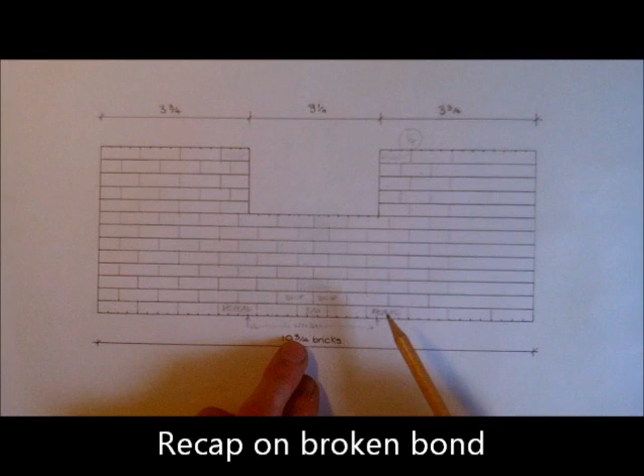Okay, so just a very brief recap on what we learnt in the last video, lesson 9. We did look at this picture here, where we introduced lots of things, and again we started off the whole of the lesson talking about dry bond, where we lay out the bricks just below ground level to make sure that we highlight any of the problems that we're going to have.

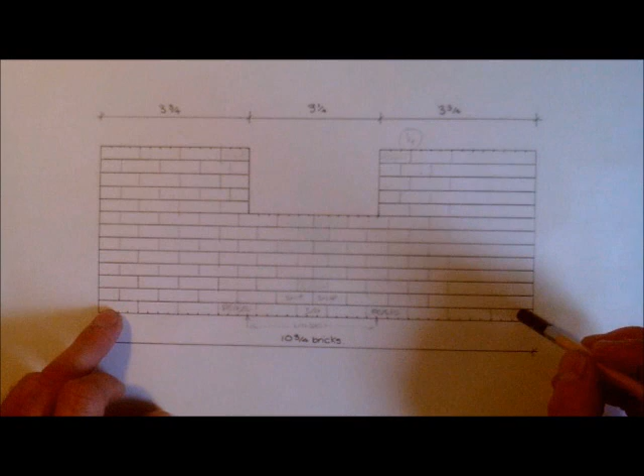We talked about whole bond, and that again was where we start with a stretcher, the bricks go all the way through and finish off with another stretcher. Invariably we said that that isn't always the case, so sometimes we have to go to reverse bond, and if reverse bond doesn't work, then the final option is a broken bond.

And what we started to go into, which we will continue to do now, is to emphasize the fact that a broken bond is rather unsightly, can be unsightly, and the skill of the bricklayer comes in where we can hide it in the best place. And if it doesn't have an internal corner where it can be hidden, and it has to be placed under a window or the sides of reveals, then again we have to look at ways in which we can disguise it the best way we can.

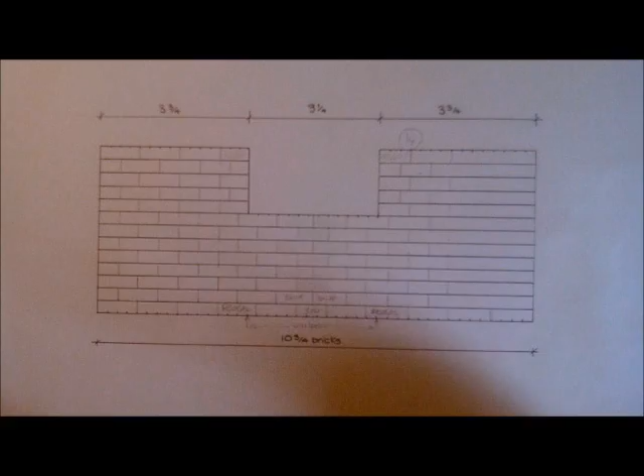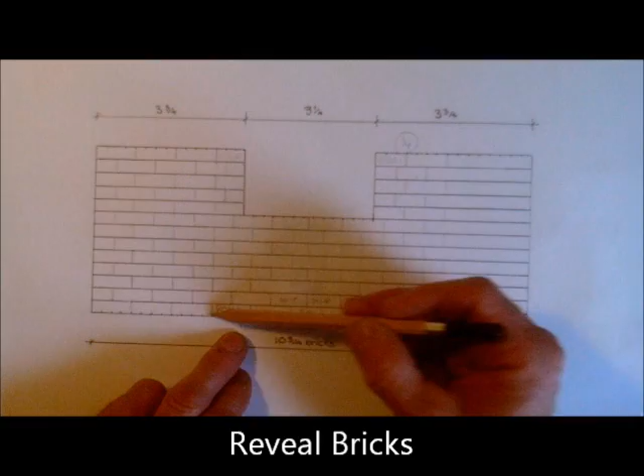We also talked about the zips that occur, and in this example here again we just mentioned about the 2/1, which looks much better. We also talked about the reveal bricks, where they are marked out on the substructure when the first course is being laid out, and then these ones should be plumbed up.

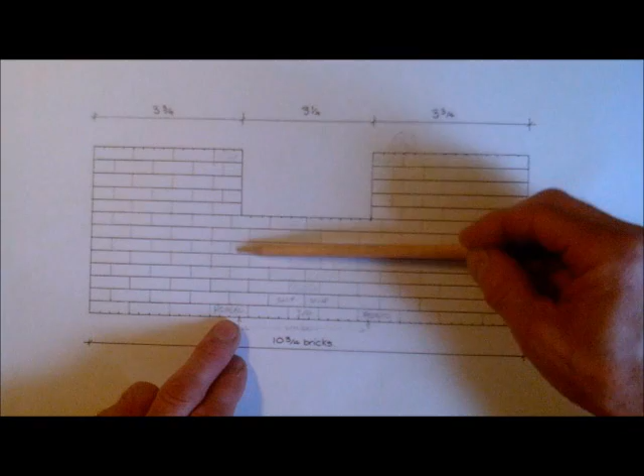What wasn't mentioned in the video though is the reason we plumb these ones up is so that when the window is positioned, the joints, which I've seen in a few cases, don't suddenly jump over to accommodate the window because these haven't been maintained in an upright position. So this just makes sure that these joints all run up. And this is what a bricklayer is always looking for, that his joints are all plumb. So plumbing up the reveals just means you don't get that sudden shift when you put the window in. So that's the importance of that.

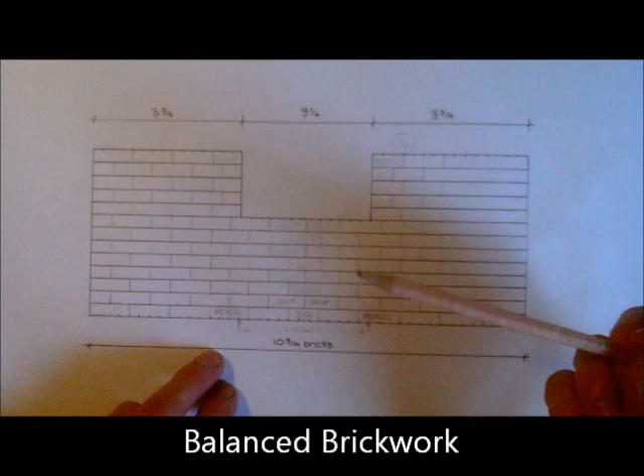We then talked about balanced brickwork, and just to emphasize again, balanced brickwork just means that we have the same cuts or bricks either side of the opening. Okay, we're going to now look at this and where this originated from as we go through this video as well.

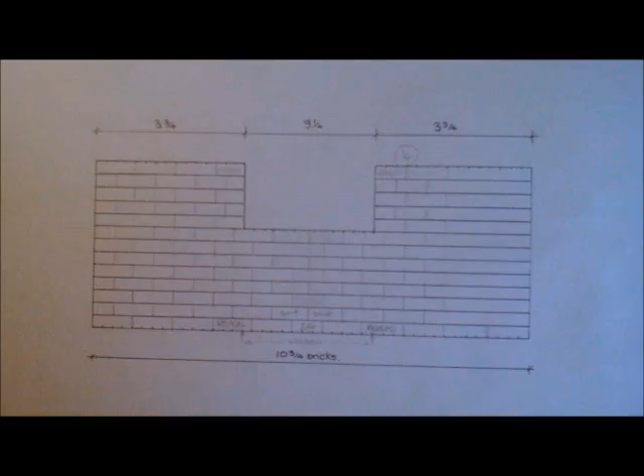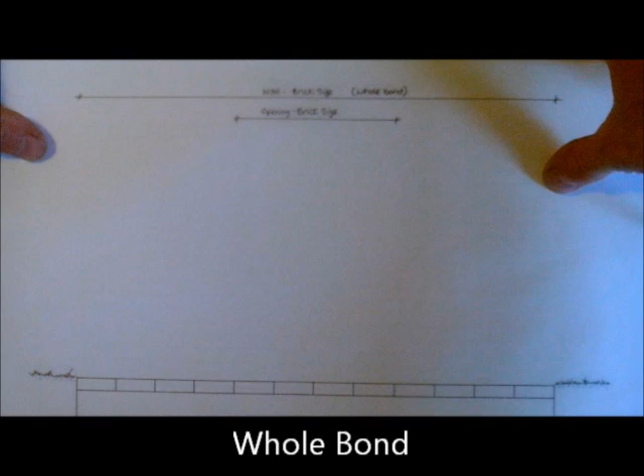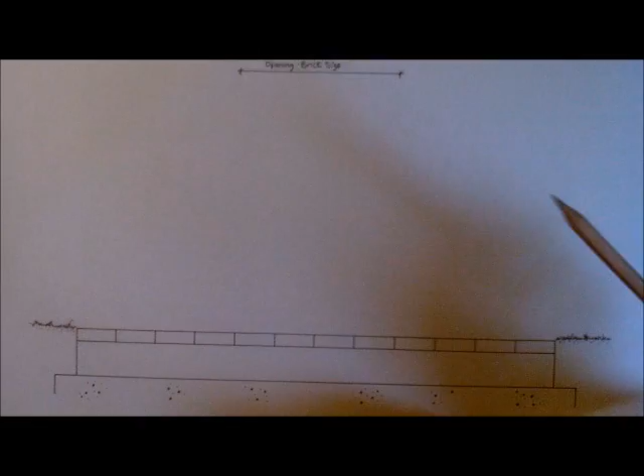So if we start from the beginning again, we're looking at, we'll just move this down, a wall here that is brick size, whole bond, and the opening size is brick size as well. So just want to emphasize what this looks like. Again, we've got the brickwork chased out on the substructure, and when it's whole bond and the wall is whole bond as well, then the result is exactly what we're looking for.

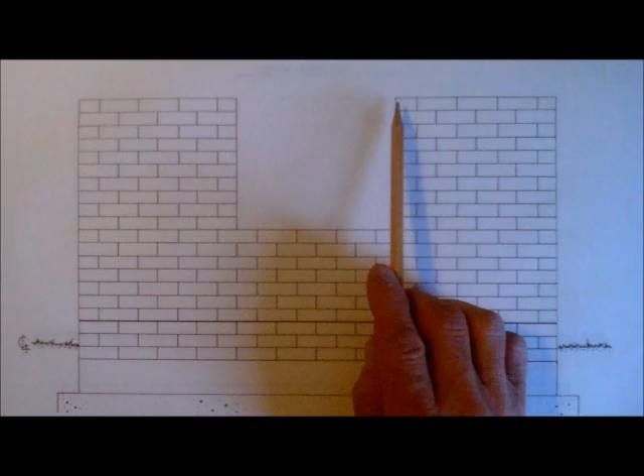We want our brickwork to look like this, where we have half bond, there's no cuts, the opening is brick size, so everything works in nicely, and because it's half bond, the window's positioned so we have balanced brickwork as well. So every box is ticked in this case, but unfortunately this doesn't always happen.

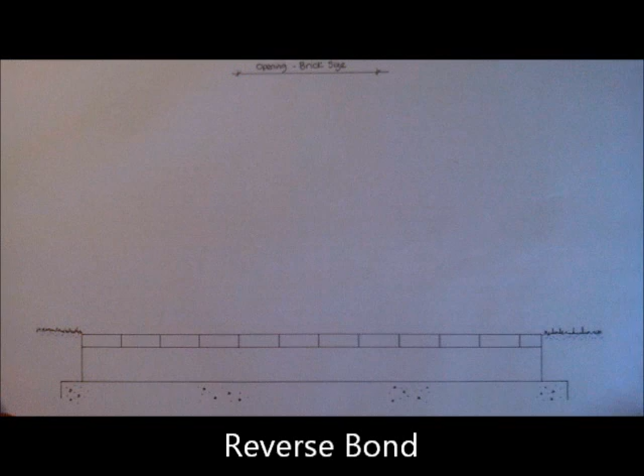So if we just go to the second one, if half bond doesn't work when we're setting out, we can see in this one we've got a wall that's brick size but in reverse bond, and then we have an opening that is brick size. Now this one is a little bit interesting because we have reverse bond, stretcher, they run all the way through whole bricks until we get to this end, and we have a header.

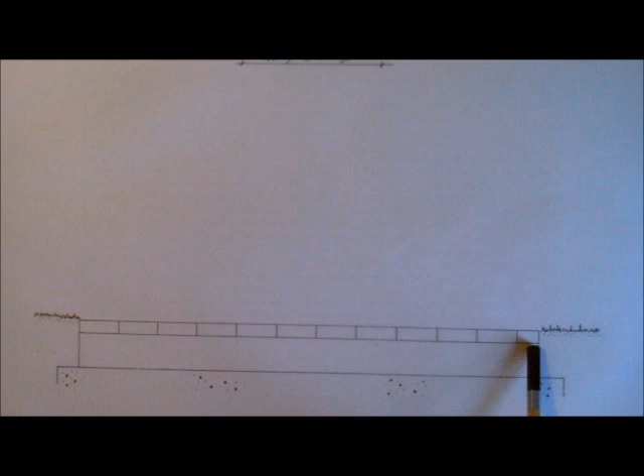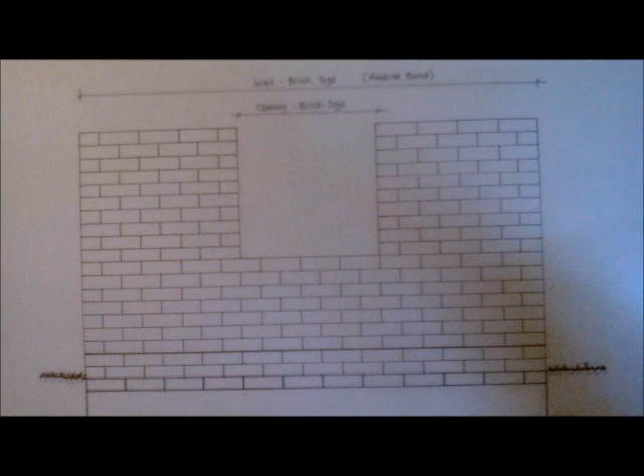Now I will keep this one here as I just bring in what goes on top of that. So what we have is another wall that looks good because there are no cuts. The brickwork runs through whole, and again it's pleasing to the eye. There is something here that we're going to go into now, because this wasn't the case long ago.

I see this, and I've done this myself many times. In stretcher bond, this is fine. But the one thing we don't have, which we did on the previous picture, is balanced brickwork on the opening. We can see here we have a stretcher, but on the other side we have a header.

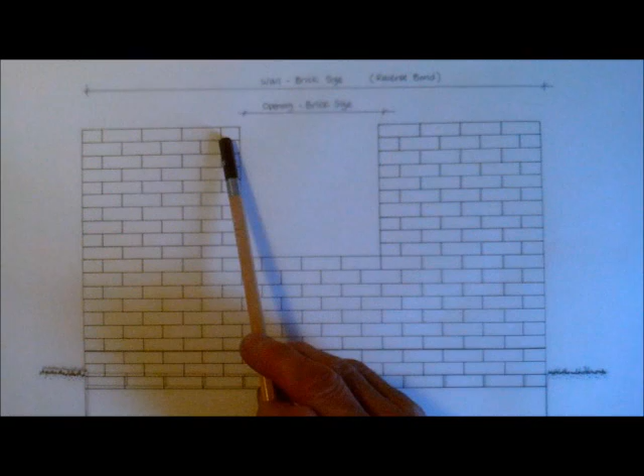Now again, when the lintel goes across, if there's soldiers there or an arch going across there or anything like that, then the brickwork that goes above that will revert back to half bond again. So again, it looks good, it's all acceptable. But years ago this didn't happen.

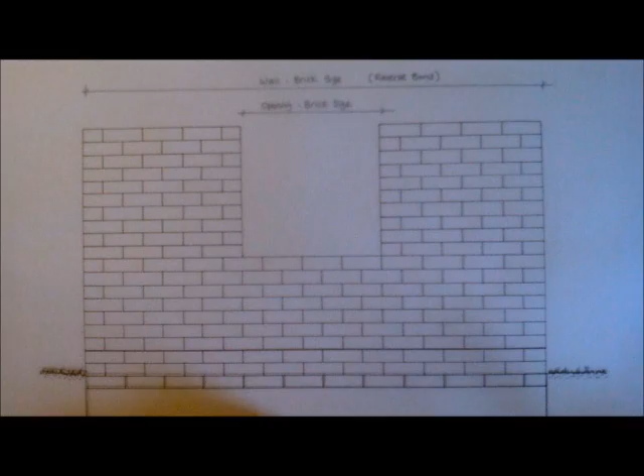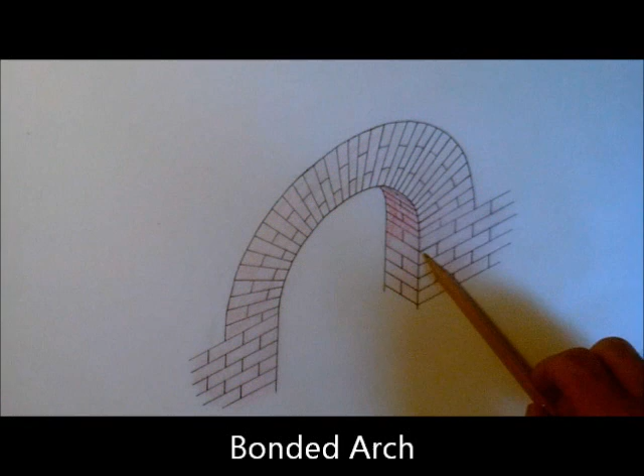And the reason it didn't happen is because, if we get rid of this, I'm going to bring in this isometric sketch that I did just to explain. Years ago, when they had arches, what they would have would be a bonded arch in many cases. So as brickwork went up, when it came to the arch, it had to be bonded to the brickwork.

So we didn't get a straight joint one side or the other. So both sides had to be the same. So this meant that any broken bonds in the wall would have been put in the window walls. Now if I just explain my terminology for window walls and window piers, if there's a wall that has, let me just draw this a bit firmer, 2 windows, not very well drawn.

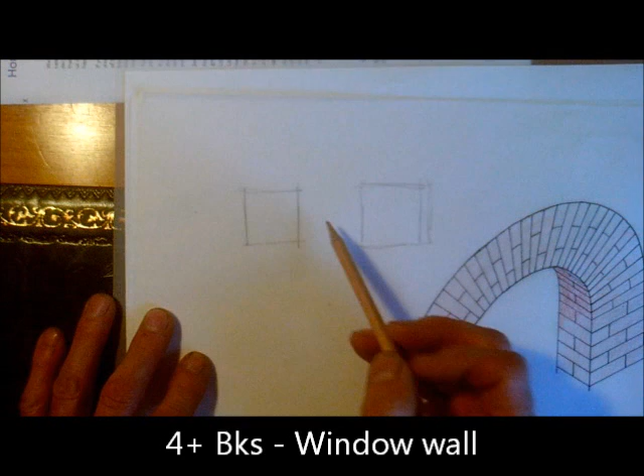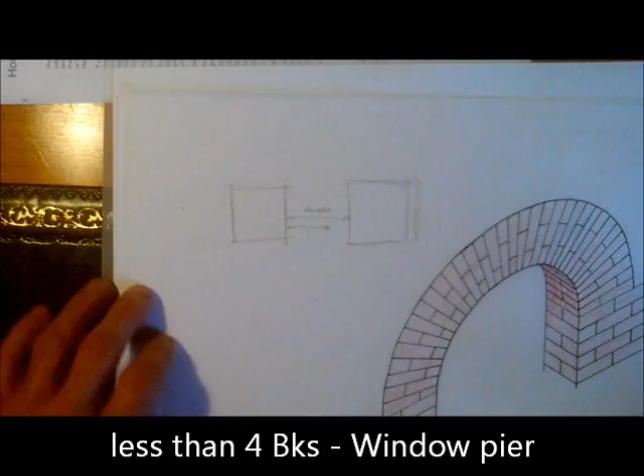If the brickwork in between is 4 bricks or more, I term that as a window wall. If it's less than 4 bricks, these are termed as window piers. Okay, so just so you understand that terminology now.

So again, if there was an opening here, a window along here, this window wall or window pier would have the broken bond to make sure that the brickwork opening was balanced. Okay, we'll look at a few pictures now where we can see this actually in place on some Flemish bond walls, and hopefully you can understand what we've just been talking about.

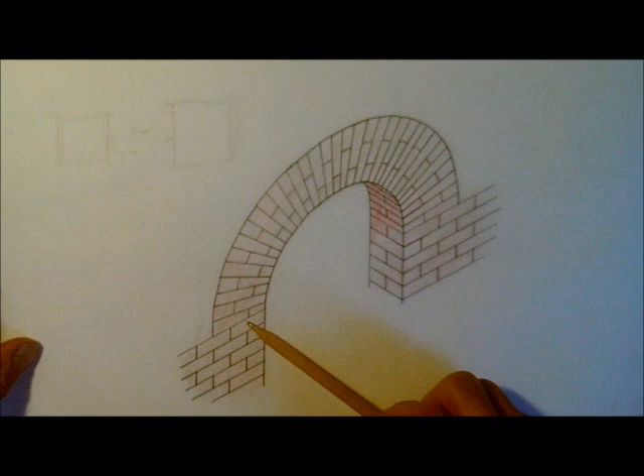So after seeing those photographs, we can see where the relevance of the balanced brickwork did come into effect. So if you just go back to the last wall that we looked at, where again we highlighted the fact here that we were in reverse bond, everything looked good, but we didn't have the balanced brickwork.

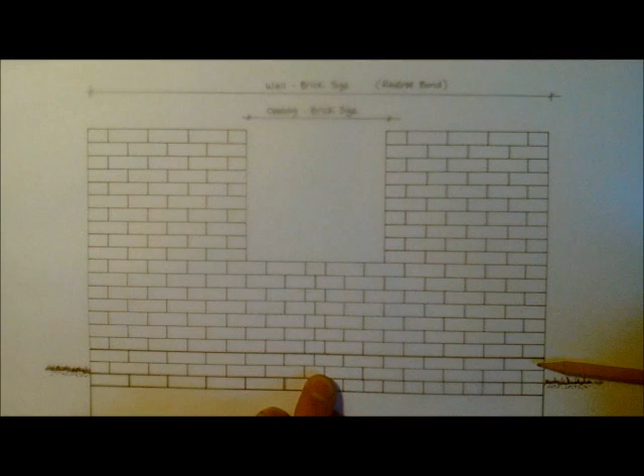Now if we look at this, taking into consideration what we've learnt and what we've seen in the arch and the 3 photographs we looked at, we have the same size wall, but this time we've changed the bottom to be, rather than reverse bond, we've got a stretcher and a stretcher, which we know the wall didn't work out, so we have a broken bond in the centre.

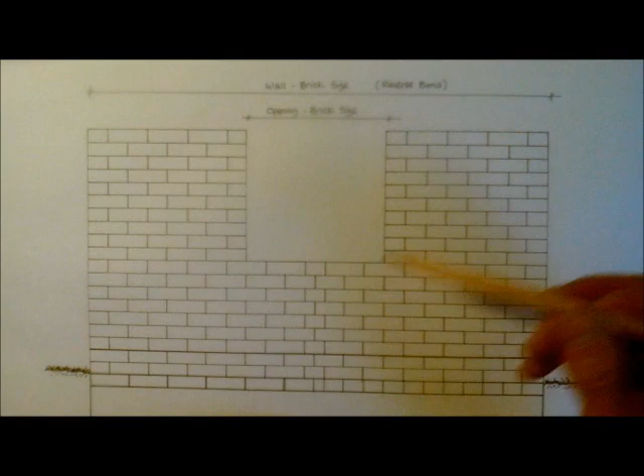But this has given us what we saw, especially in the stretcher bond photograph. We did see this zip in effect, or having to be put in, but again it did leave us with balanced brickwork across the opening. Again, I've shown this as it was in the photograph, but we have learnt from what we have been doing that we can get rid of this header.

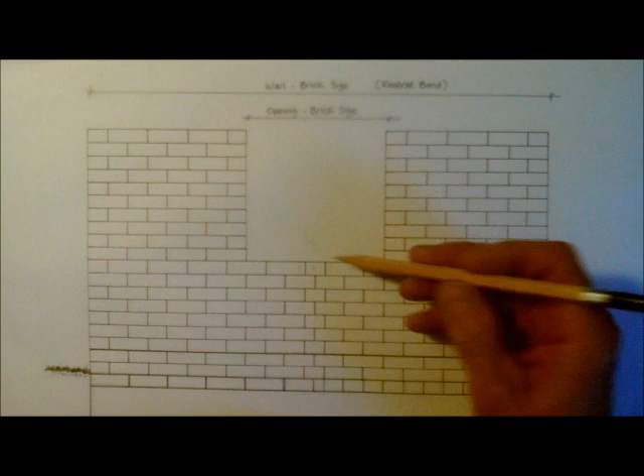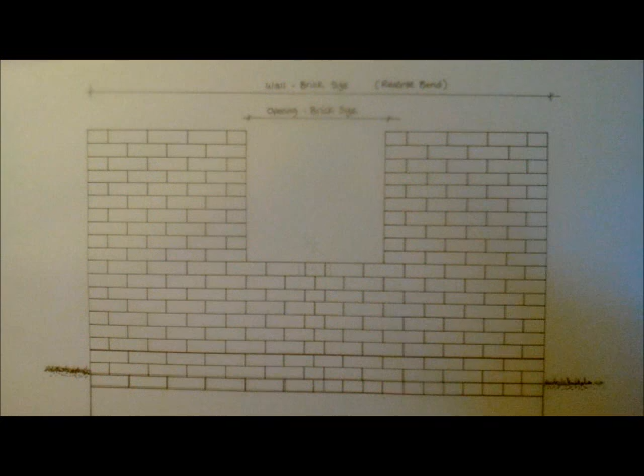So hopefully we're now starting to understand in a bit more detail the problems that we have with broken bonds and reverse bonds, and now that we're thinking about balanced brickwork as well, hopefully we're going to be looking at this and the next video with a little bit more knowledge on how to get over these problems.